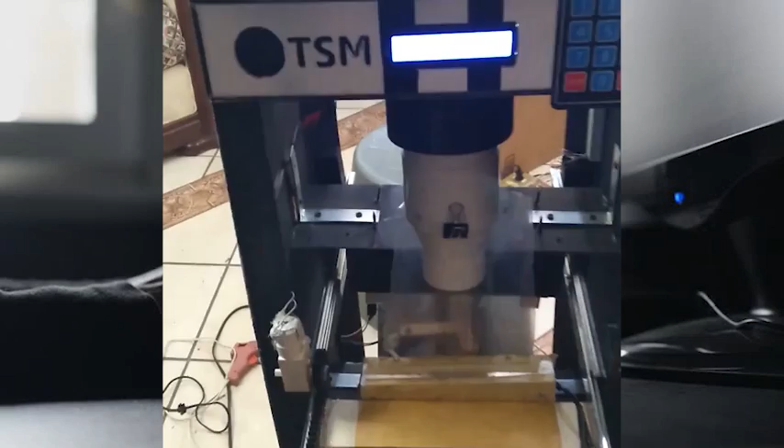Once the required weight was on the bag, which was measured by the load sensor, the two motors connect to a rack gear transmission, seal the bag, finishing the process.

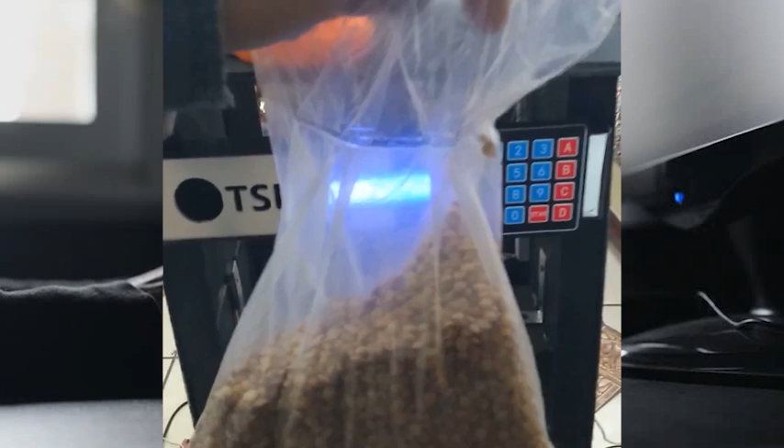However, the limitations of this machine were massive in comparison to the industry needs. Its limited storage, along with the fact that you had to change the bags manually and the structural stability of the machine, were a formula to disaster.

So, we worked the project of this machine to overcome these limitations and create the ultimate thermal sealer machine of bulk products. Thermal sealer development.

The thermal sealer only went through two stages of development. For the first design, we planned to seal the bags using a simple gear transmission, where each part of the sealer were attached to a gear.

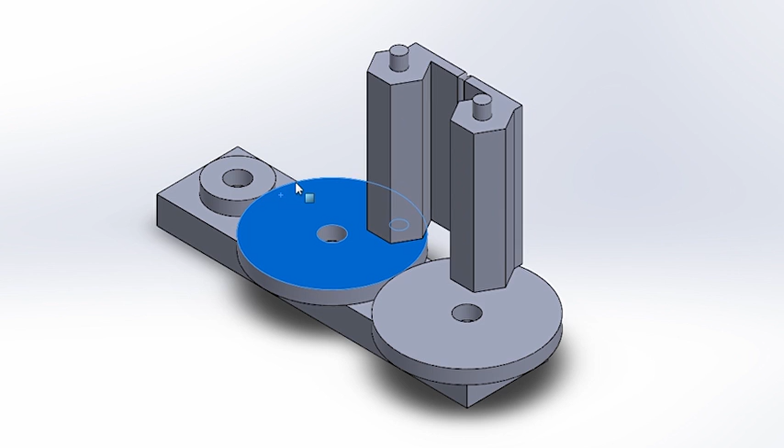This way, the system seals and pulls the bag once both parts of the sealer meet per revolution, sealing the bag and pulling more plastic tube to pack the next bag.

This idea was scrapped because the system was too bulky to fit in the machine, and because it was impossible to cut the plastic tube in bags.

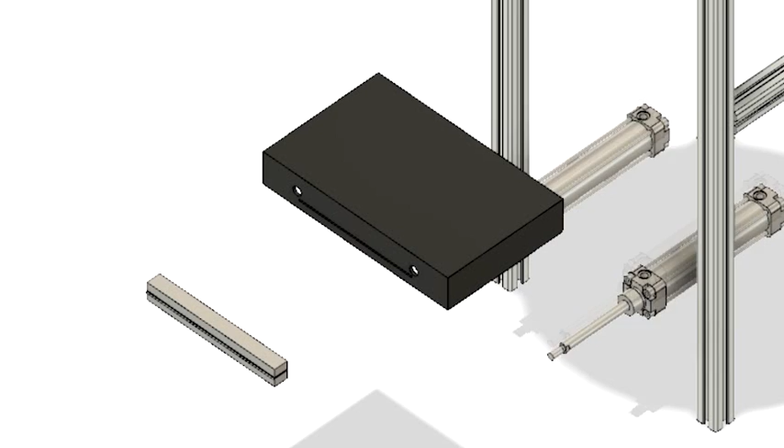The second and most recent design is a pneumatic sealer, which has a blade between two heated pieces of metal, pushing the plastic tube to a wall where the bag gets sealed and cut, making it lighter, easy and simple to activate. This design for the sealer stayed even though other parts of the machine were changed.

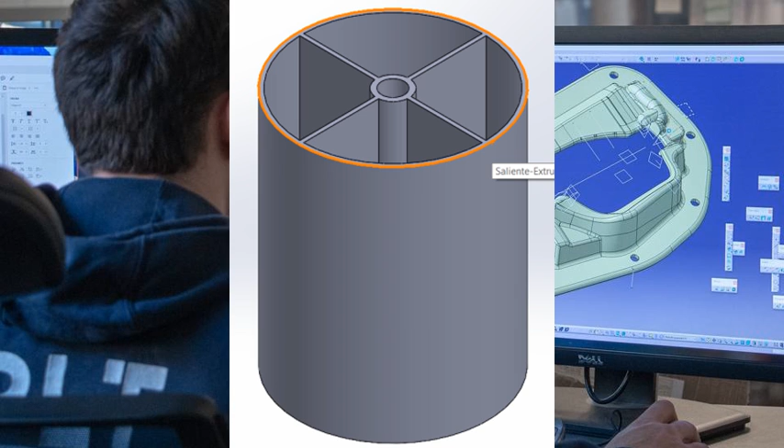Hopper's development. The hopper is a part of the machine which went through a lot of changes, having around 4 versions of it. The first design is based on the first iteration of the dispenser part of the machine.

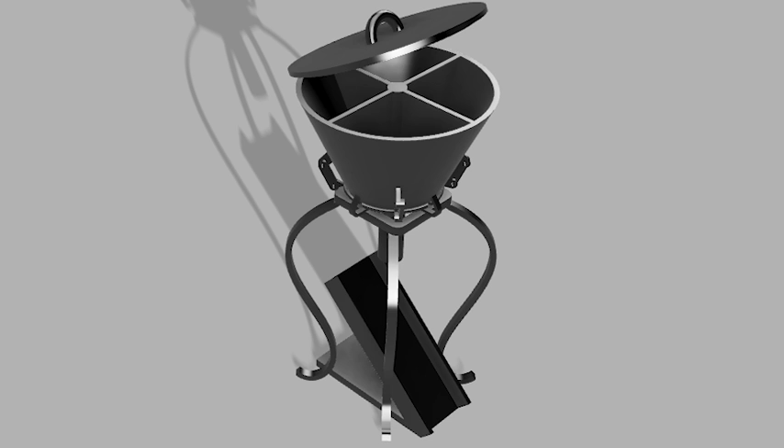This version was scrapped in early development because we weren't able to figure where the motor was going to be attached. The second design works as a sliding moved by a mechanical joint acting as a crank, which allows or obstructs the flow of bulk product.

This idea seemed ideal and ingenious. However, this idea was scrapped because the way you attach the actuator to the system were too bulky.

For the third design, we went for the simple. We decided to attach the motor directly to the latch, each container allowing or obstructing the flow of bulk products.

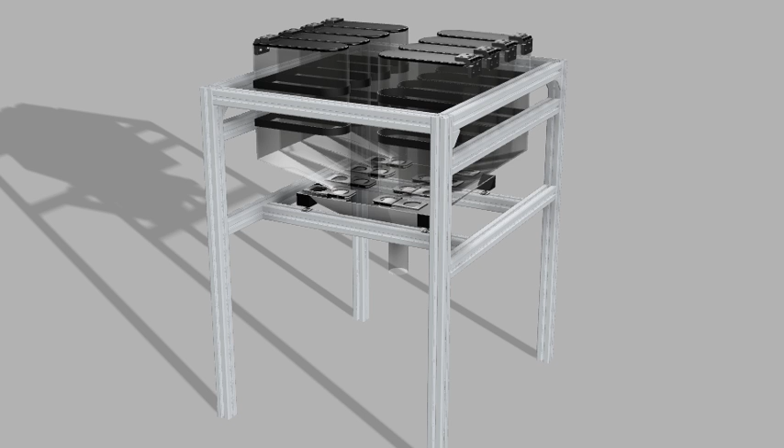We only have one major problem, because we use one motor per container, and we used 6 containers, we had too many motors on the machine. This increased the electric consumption on the machine and the cost of it.

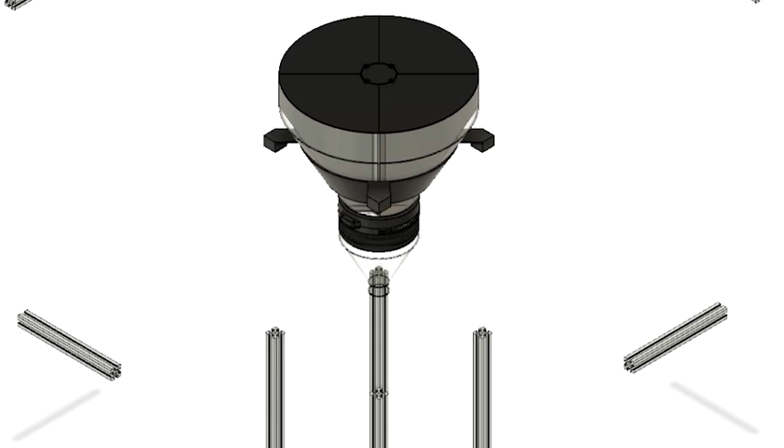This was impractical, so the idea was scrapped and made the most recent design. The fourth design works the same as the first design and the first machine. A gear with a hole attached to a chute with 4 holes, one for each product, which allows the selected flow of bulk product depending on where the hole and the gear matches.

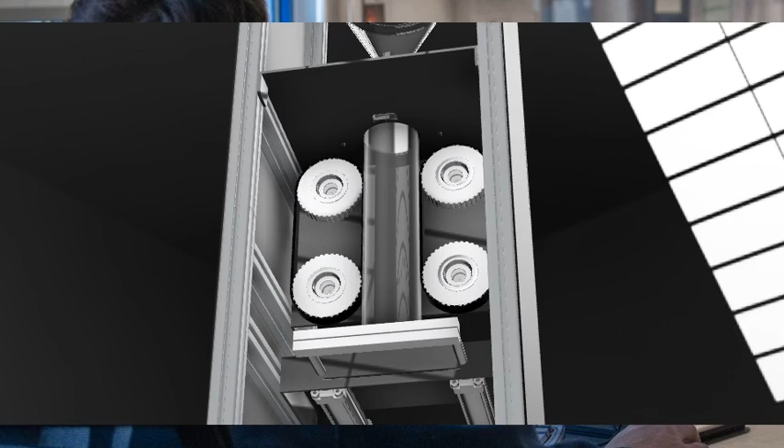Sealer bag: A belt of 762 mm longitude driven by 2 gears of 120 mm of diameter extracts the necessary amount of sealed plastic bag depending on how much product is going to be packed. This is controlled by 4 motor control steppers to give precision on each millimeter of plastic bag extracted.

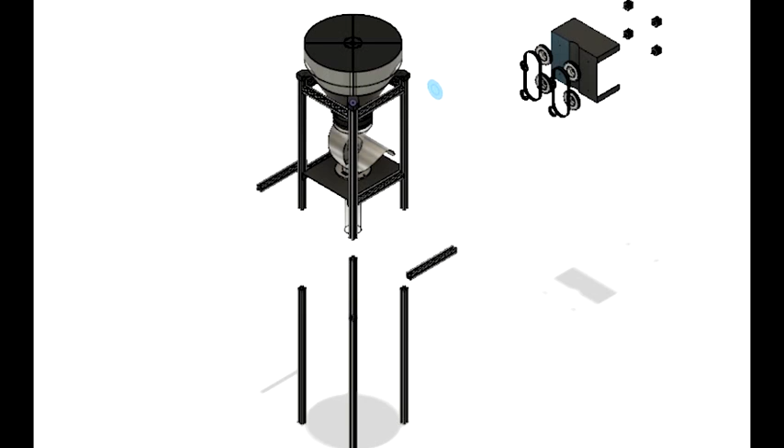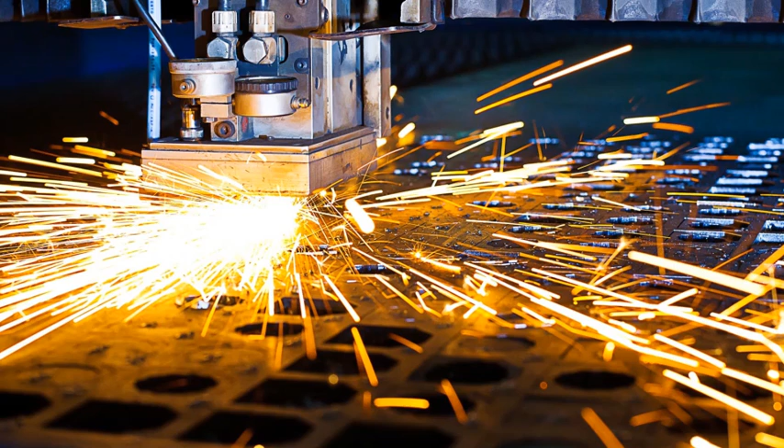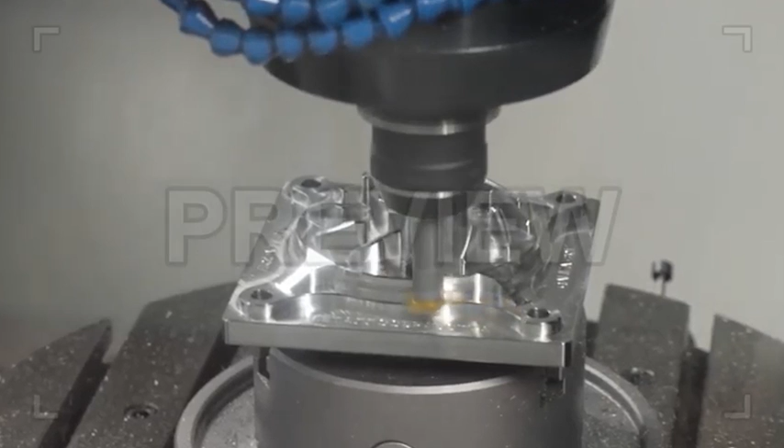CNC machining is basically used to make a set of gears that will make the mechanism of product selection simpler. To do that, we need a specific type of gear that is not found in the market.

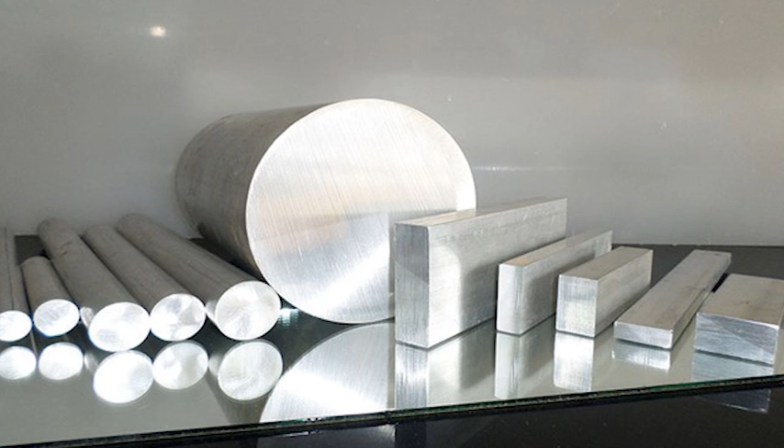We decided to make the main gears of the machine out of aluminum 6061 T6. That is one of the most commercial aluminums, with high machinability capacity and also high mechanical resistance. That is one of the most important things here, because the machine is going to carry a lot of weight.

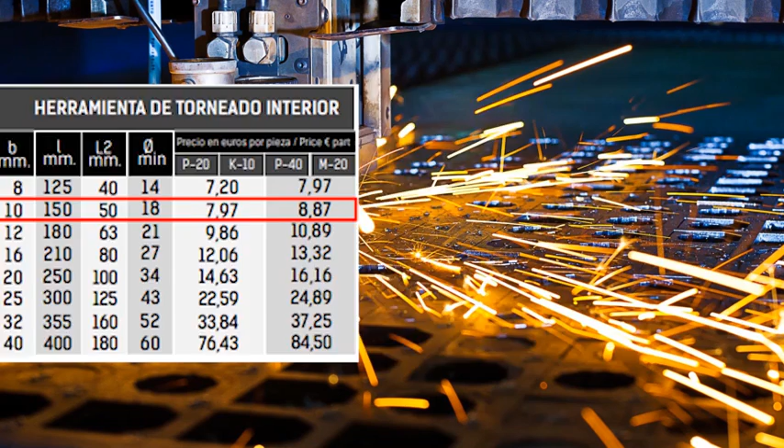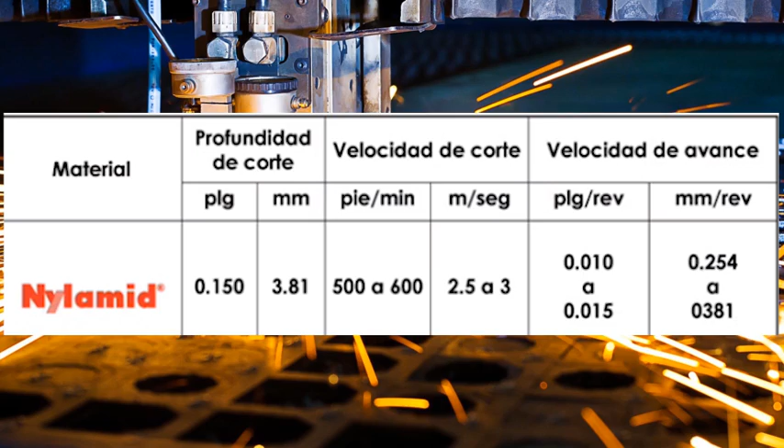We're also making use of 3 main spindles: one DIN 4974 of 10mm, one DIN 6535, and one upcut of 1.5mm. Also, a quick note: when we machine the gears made out of Nylamid, we use different velocities due to the different mechanical properties of this material.

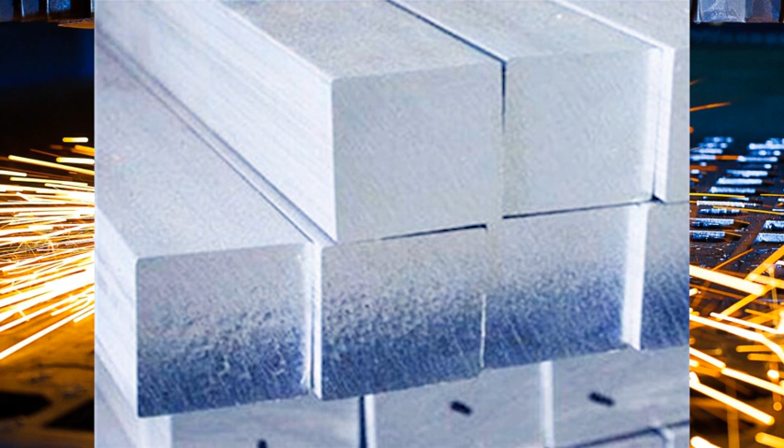The main frame of the machine is made out of aluminum of group 2000. This is because it has high mechanical resistance but low corrosion resistance.

This low corrosion resistance means it's going to have a special paint treatment to compensate.

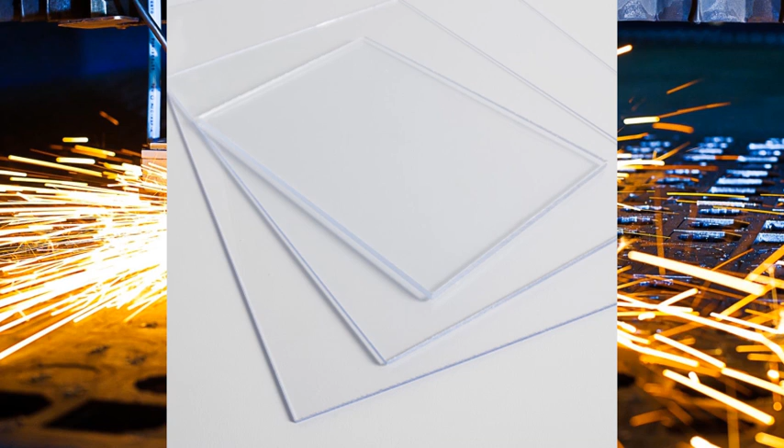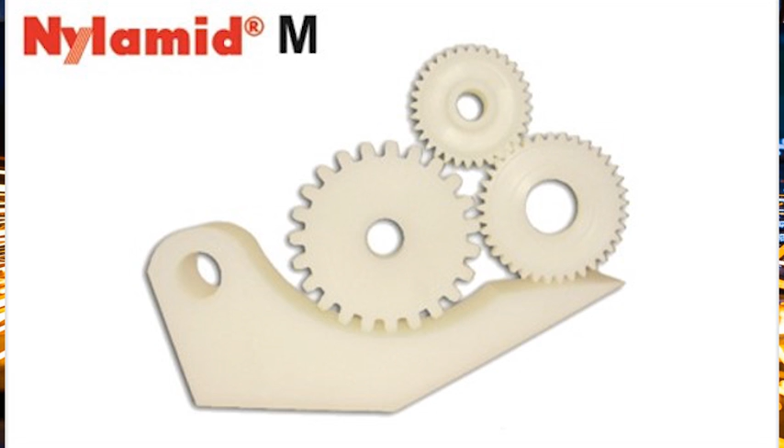For the mechanism that's going to have direct contact with food, we're going to use 3 FDA-approved materials: high impact polystyrene sheets, this is the cone that my partner is going to explain later, and also Nylamid type M and Tecaflon PTFE. This is because these two materials provide the security we wanted, to reduce friction between these plastics, prevent any type of combustion, and also because these materials do not affect food taste at all.

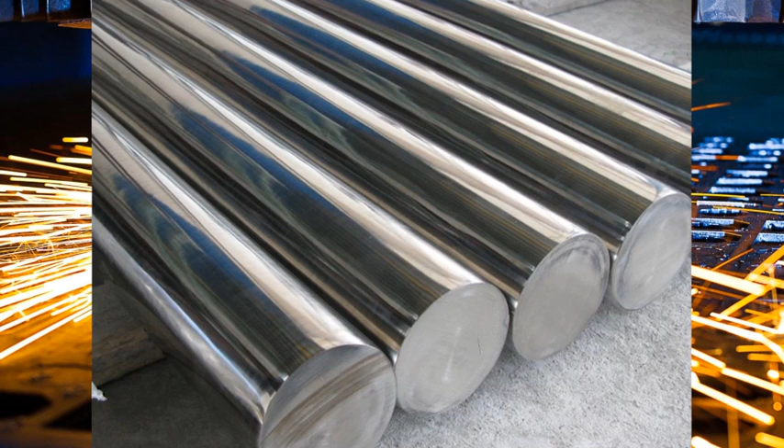Finally, we're going to use stainless steel 316 rods for the bag mechanism. This is for the bag that's going to be in constant rolling, and this stainless steel is FDA approved, so the bags are not going to contain any type of toxicity.

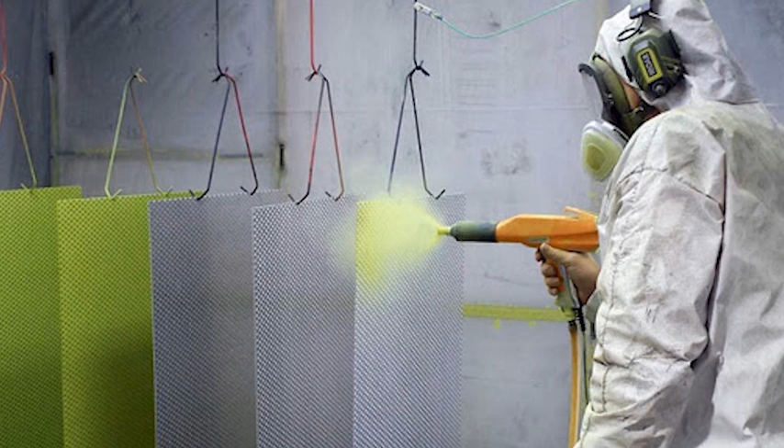There are 3 types of painting processes: monolayer, bilayer, and 3-layer. These are used for different purposes. The one we are using for our machine is the bilayer painting, due to its utilization in the automotive industry.

One of the reasons we're using this is because the materials we're using are weak to corrosion, and this type of painting helps prevent it. The paint we're using is food safe grade.

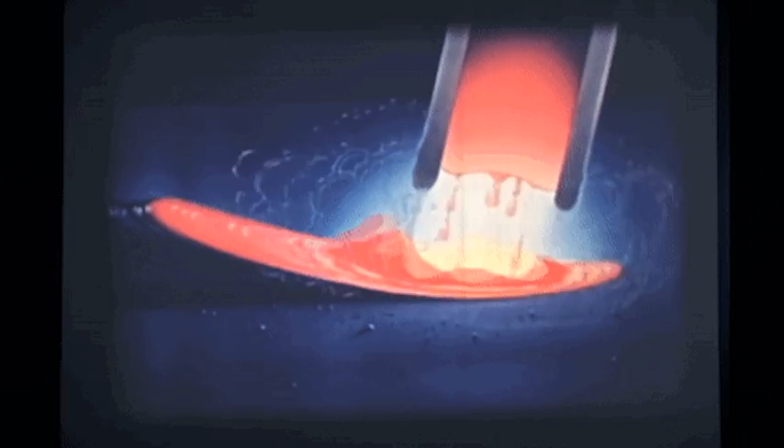For welding the main structure, we're using the SMAW process. It's a manual arc welding process that uses a consumable electrode covered with a flux to lay the weld. We're using it due to the material, which is space grade aluminum.

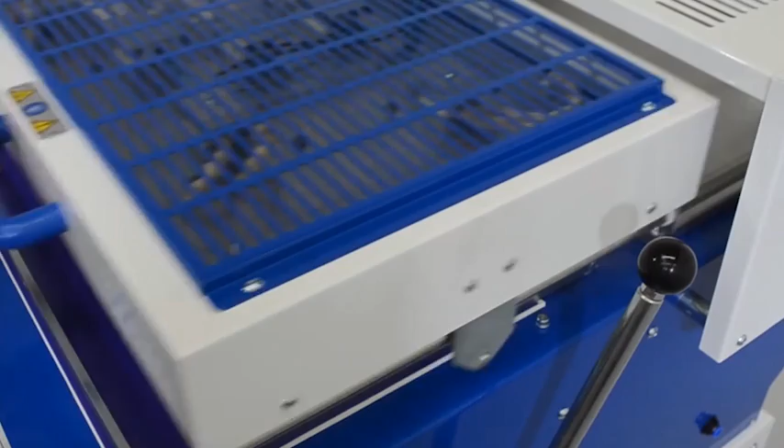We did not find the container specific to our project, or the main cone for the dispenser, so we're using vacuum forming to create our own containers and the main dispenser. The process is simple: we use high-impact polystyrene sheeting, HIPS, a food-grade thermoforming plastic, to mold our containers.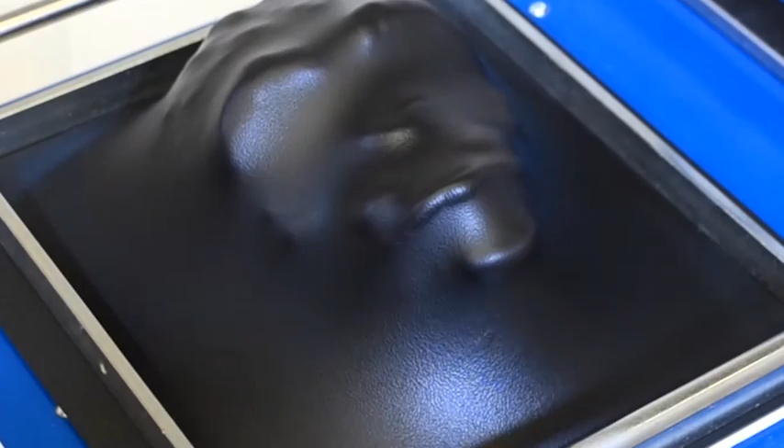These are also used for butter or even Yakult or Danoninos. The process is simple: we heat the plastic sheet, put it in the machine, and finally turn the vacuum on, and it sucks all the air out, so we're left with the piece we want.

Then we cut into it using scissors or some kind of saw. Vacuum forming is done one part at a time using a vacuum forming machine.

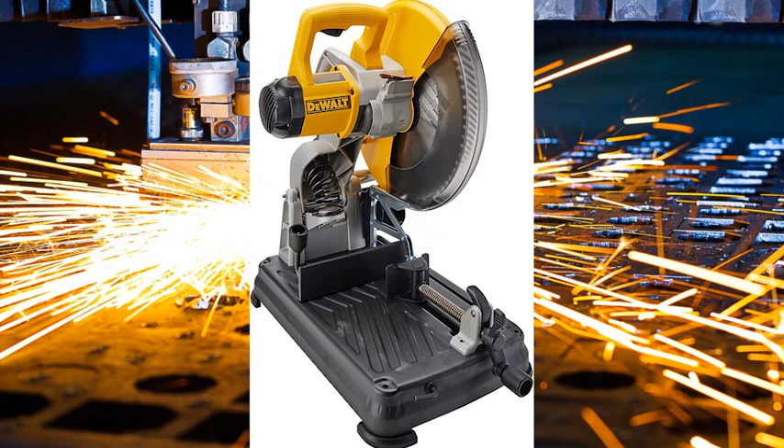To cut the parts for our machine, we're using a vertical saw as the main tool to cut down the pieces we need. To cut down the T-slotted aluminum profiles, we need a metal cutting saw with carbide tip blades on the main cutting disc, which we're also using for cutting the main frame for the machine.

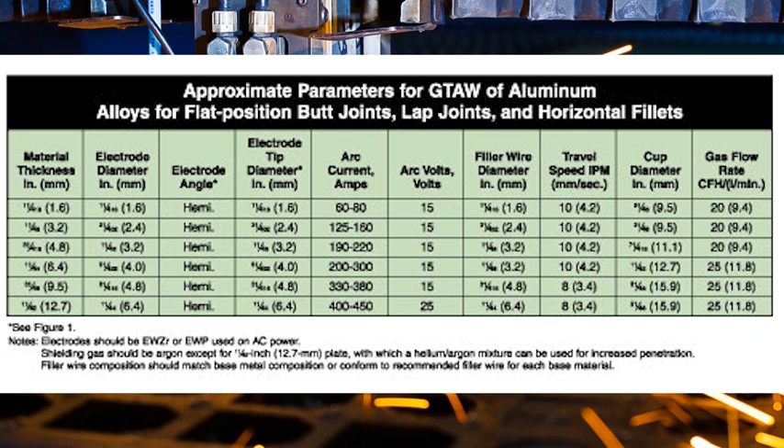I'm showing the main amperage used for some of the materials. We're also using Grillumin 14 for the main electrodes, due to it being the perfect welding rod for the SMAW process. It's also specialized for aluminum silicon alloys, so it's perfect for our machine.

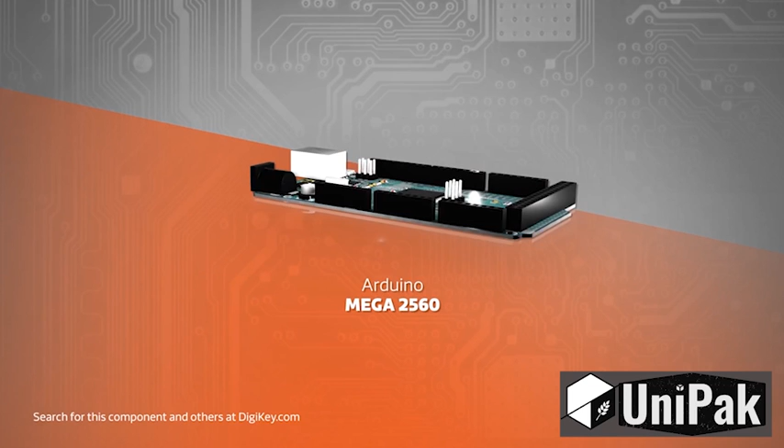We chose the microcontroller Arduino Mega 2560, which is a microcontroller board based on the ATmega 2560. It has 54 digital input-output pins, of which 15 can be used as PWM outputs, 16 analog inputs, and 4 UART serial ports.

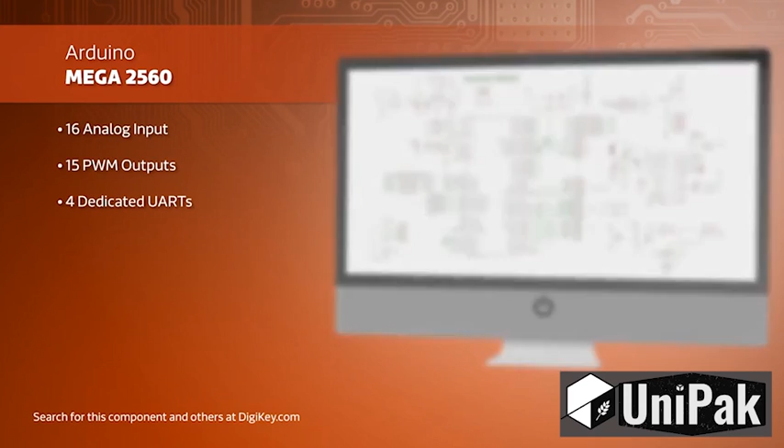Here are some of the reasons why we chose this microcontroller: it's low-cost, it has enough I/O ports to cover all our needs, its programming language is C-based, it has a smaller circuit board than a PLC, a wide variety of module sensors are available, low energy consumption, and PWM outputs.

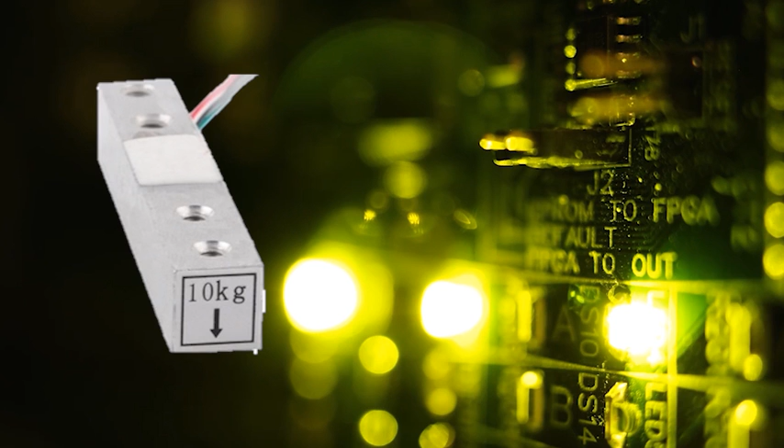Sensors: LM35 sensor for temperature reading on the sealers, a 10 kg load cell to weigh the product, an optic reflexive infrared sensor to detect the product flow, and a limit switch for the back row.

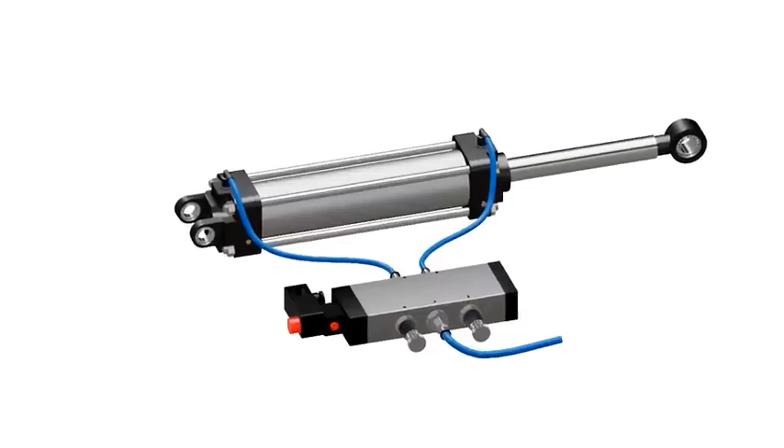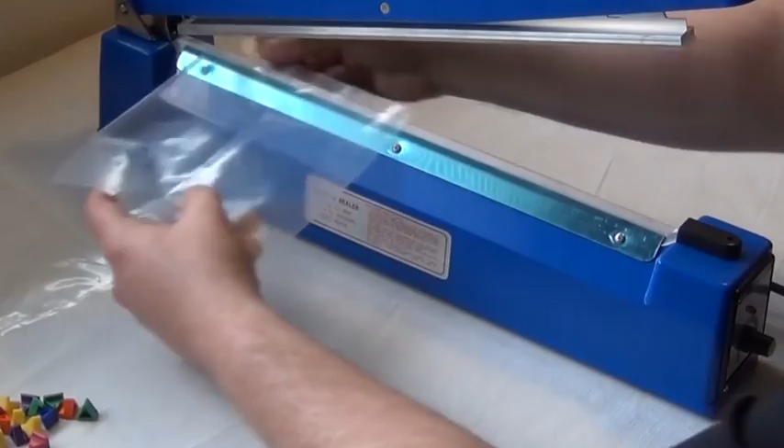Actuators: a 5-2 electro valve to control the pneumatic cylinder, a pneumatic cylinder to push the thermal sealer, an MG996R servo motor to let the products pass to the container, an upper thermal sealer to shape the plastic roll into a bag, and a lower thermal sealer to close the bag at both ends.

It is in the lower part of the machine. Two full rotation 25 kg servo motors control the product selector and the gate so the product can pass, and high torque motors drive the rollers to pull down the plastic bag.

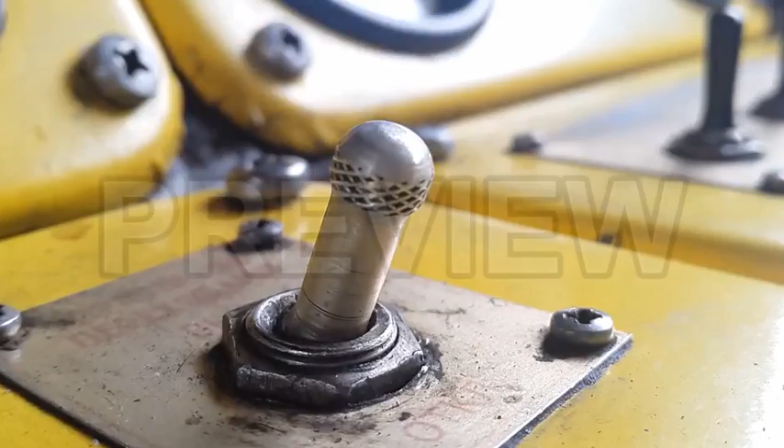Security elements: an on/off switch to turn the machine on and off, an emergency stop to retract the sealing cylinders and cut the current of the machine, a control case where all the control elements are mounted, and an energy case where the supply and related elements are located.

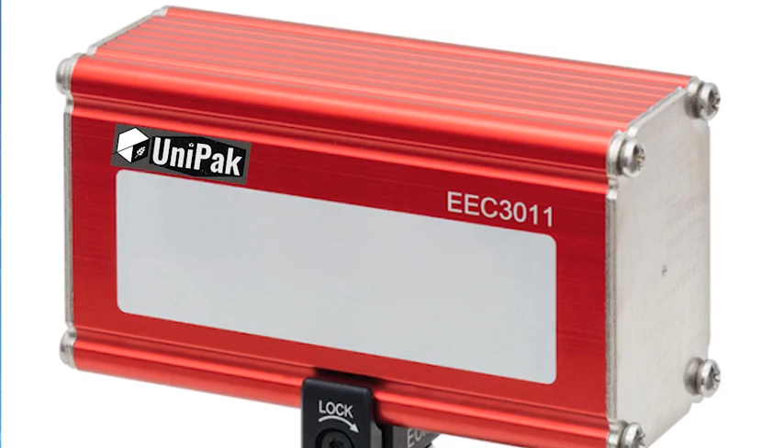Here we have the electric circuit of the temperature sensor for the thermal sealing part of the project. It has its own amplification circuit made of two LM324s, the first acting as a buffer to keep the signal strength, and the second to amplify the signal so we can make the reading in volts instead of millivolts. With this, we save a certain amount of code lines.

Here we have the AC dimmer circuit to control the heat based on the temperature reading. The amount of heat is the product of current and voltage, so we control it using PWM through an IGBT triggered by an optocoupler.

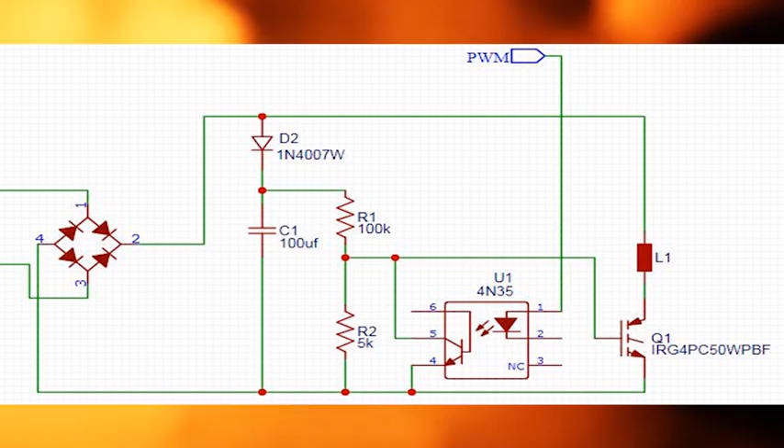Now we have the circuit for the stepper motors, the load cells, the temperature sensor, the HMI, the servo motors, and the two thermal sealers. These are the main circuits in our project. Finally, we end up with a circuit board of 17 by 9 centimeters.

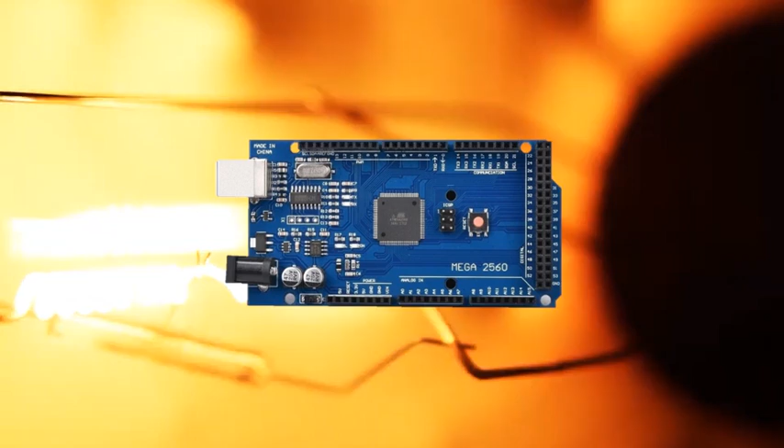Kilowatt-hour consumption: these are the elements that require the most energy in the machine. We have a compressor, one MG996R servo motor, an electrovalve, two thermal sealers, an Arduino Mega 2560, one 7-inch display connection, two full rotation servo motors, and two high torque motors.

At the end of the day, we have a current consumption of 7.085 amperes, and finally a total consumption of 287.93 kilowatt-hours per month.

Process: first, it must be emphasized that this is not a 100% automatic process, because there is interaction between the user and the machine. So, let's start with the process.

First, a menu with the 4 products is going to be displayed on the HMI. After selecting the product, the HMI will ask you to select the quantity of product you want, or select the amount of money you want to spend.

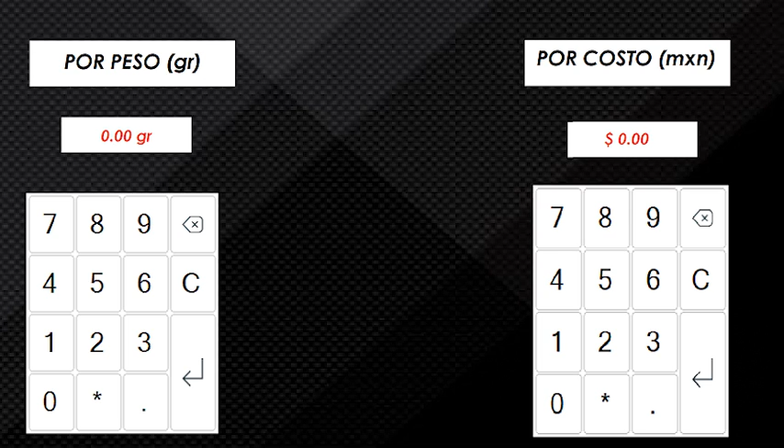Then, the motor located under the containers rotates the platform to align the selected product. After that, the second motor opens the gate, allowing the product to pass into the load cell. When the weight in the load cell equals the chosen value, the motor is activated again, but this time blocking the passage of product.

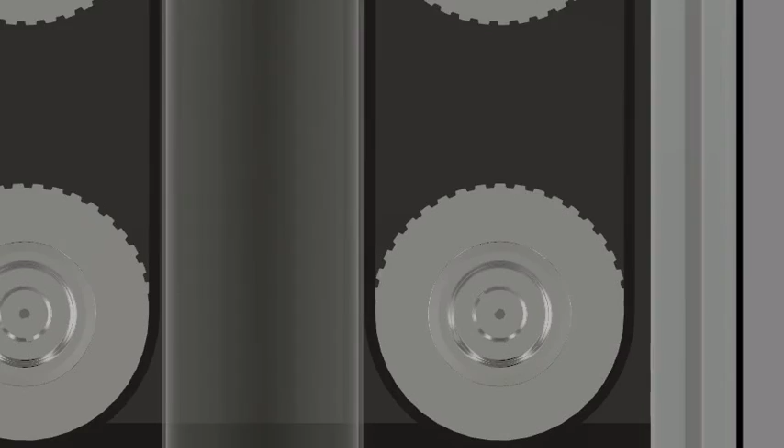With this, there is not going to be any product loss. Then, the side rollers will pull a percentage of the bag, and the solenoid valve is activated, in turn activating the piston for the lower sealing of the bag.

Next, a signal activates the rollers so the product pack moves below the lower sealing section. Then the solenoid valve opens and closes the piston to seal and cut the top of the bag, giving you a sealed bag with the amount of product you selected.

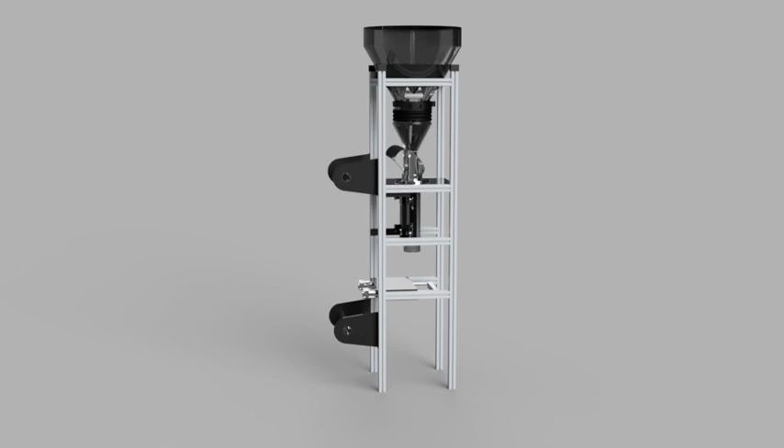So, as you can see, with all this development, we've come up with a suitable, more economic machine capable of giving a boost to small businesses out there. There is a lot of competition in the bulk food ingredients market, but with our machine, we estimate a suitable profit compared to the manual bagging process.

We estimate that the annual profit when making the process manually is around $31,320 United States dollars, but with UniPak, that profit goes up to $187,920 United States dollars, based on the previous market of bulk products in Mexico.

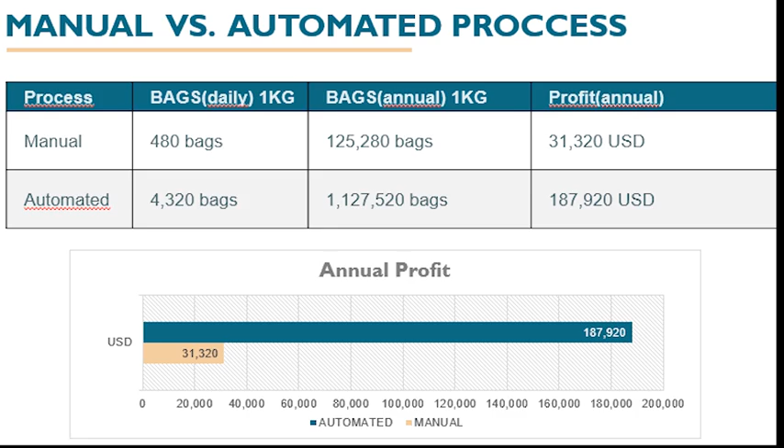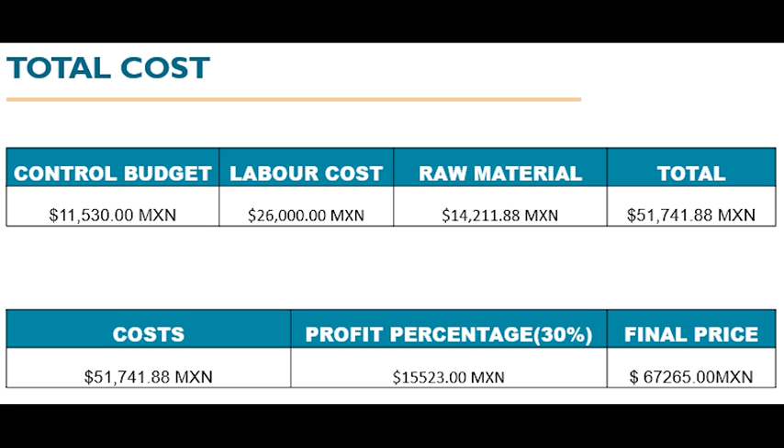We researched all the materials to provide the quality and capability of an industrial machine in a form suitable for local business, and we arrived at a machine valued at 67,265 Mexican pesos. With this, we offer opportunities for smart entrepreneurs to start on the right foot on their journey to succeed in one of the most competitive food markets out there.

We want to create an easy and effective, no-training-time, no-pollution, easy-to-use machine. High opportunities, low risk — we are Unipack.